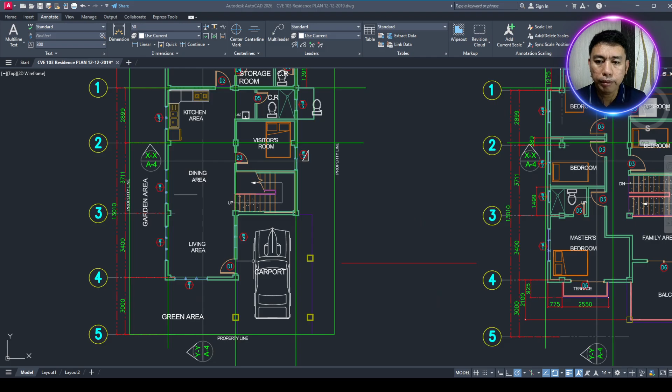So this is a continuation of the architectural part of our design. So far we finished the floor plans, so hopefully you already established your floor plans and there's nothing more to edit. But if I had comments before on the floor plan, please try to update it, but not the overall form or overall layout of the floor plan. The details you can enhance regarding the details.

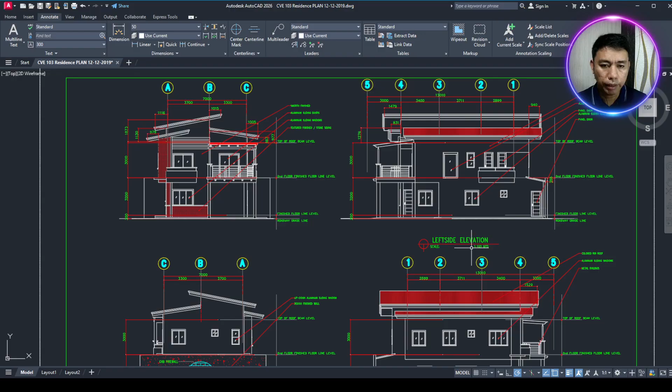Okay, so we are still on the architectural part. We have the floor plans, and then we just finished the elevation views of our model. Although you already submitted the requirements for the elevation views, you still need to update the details to enhance them, minor details, so that when we get to the overall submission of the design, at least your drawing is enhanced. Make sure you follow the guidelines I gave, the photos I sent in our group chat. So we're done with elevation views, and then the roof plan view, and then we have the cross-section views.

So there are things in the architectural aspects that we need to discuss further. This is also what you need to add to your plan. So we have the doors and window details. The doors and windows you used, let's add details to them. So this is what I'm talking about, the elevation view of doors and windows.

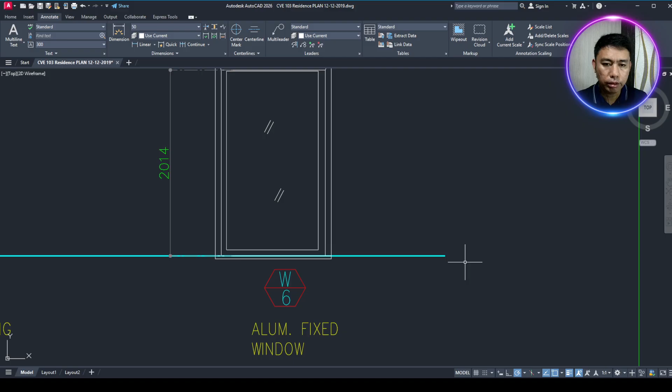It has a dimension, okay. So yeah, this is what I said, 900 mm or 0.9 meters - I didn't label it here, but there's a finished floor line. This blue line here is the finished floor line. So the window, this is not - this is the very bottom of the window. But this one also has a design on the outside, if you can see, it's like a molding. I think molding is the term.

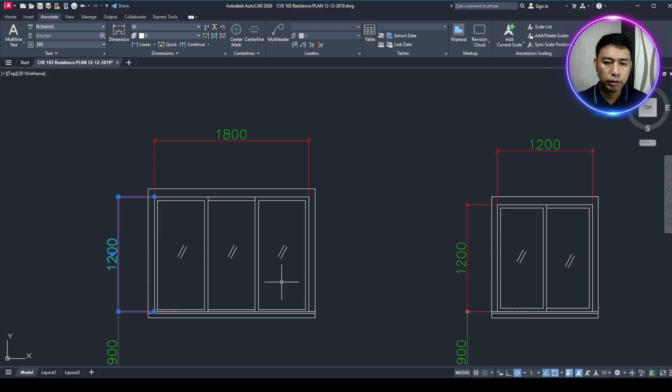Aside from the detail, the opening of the window, you should have a detail there. So this is window, three windows here, and then a two-span window. This one is elevated, but this is just a special case. Normally our elevation is 900, but this one can differ. We can make a small window, but the header at the top should be level. The door and window headers should always be level, 2.10 is our standard.

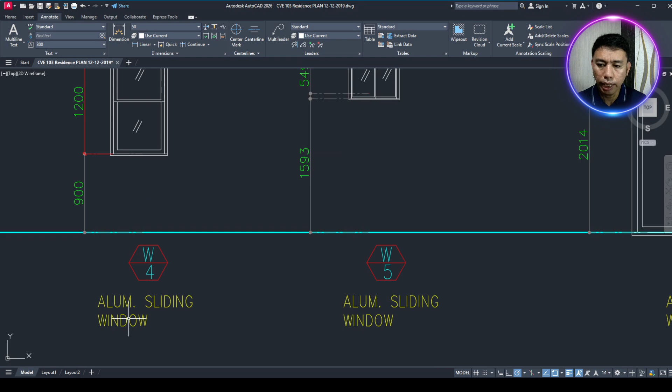And then you have these, like sliding windows - aluminum sliding glass window, yeah, aluminum sliding window. Then this one is a fixed window, just glass, that's why it's fixed.

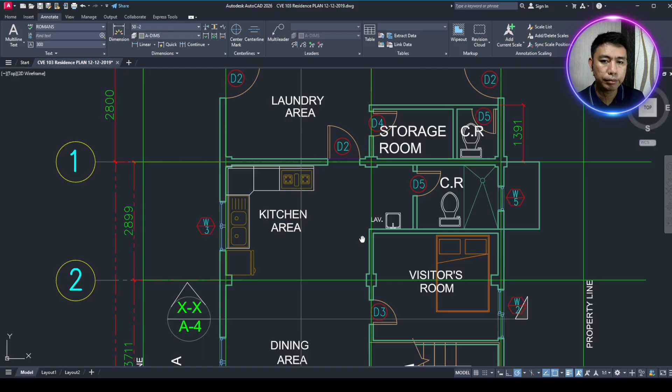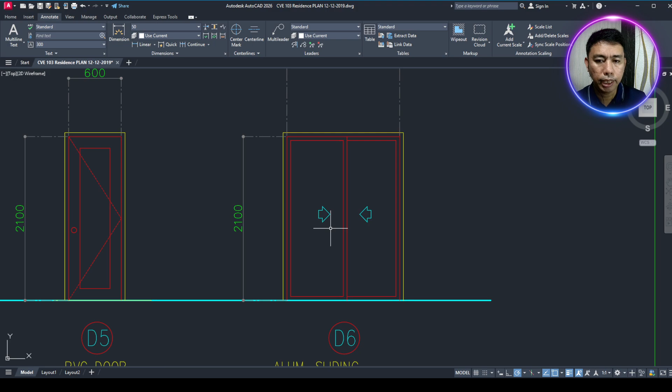Then we have sliding doors. You have to put an arrow indicating the direction of the slide. So this one is an aluminum sliding door - D6. If you look at D6, we can see where it is, at the terrace, because there's a sliding door we made there.

So, yan. Okay? So, you have to add this one, doors and window details. Okay? And, by the way, the template, ibibigay ko itong template sa inyo later na. Okay, itong templates, paano i-arrange. Sa final submission, this one is for final submission. But you need to submit first, ito yung mga individual details.

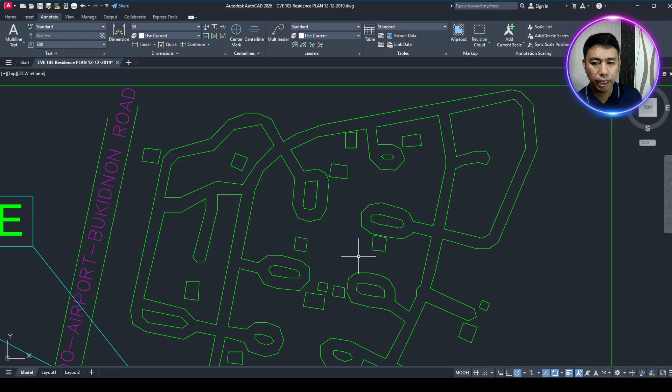Yan. And then parang mga bahay yan siya. Yan yung mga bahay na makikita. Okay. So, from this one, i-identify nyo kung may mosque, may church. Yan, mga important landmarks yan siya. Okay? Para the building officials, when they will visit the site, they will know where to find it using the vicinity maps.

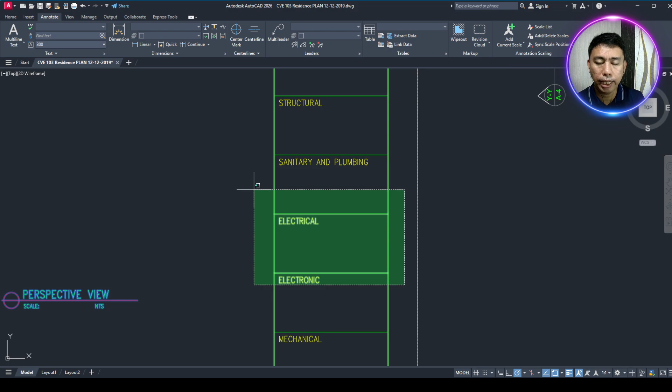Alright? So, yun ang idagdag ninyo. Meron pa pala, mayroon pang perspective view, but ang perspective view later ko na gusto kong i-discuss sa inyo on-site, sa classroom na. But so far, ang i-finish nyo muna is yung doors and windows details and then the site development plan and then the vicinity maps. Okay. So regarding the templates, I will give these templates to you later for your reference. Okay. So, hindi ko na ano sa inyo ito, but ibigay ko na lang.

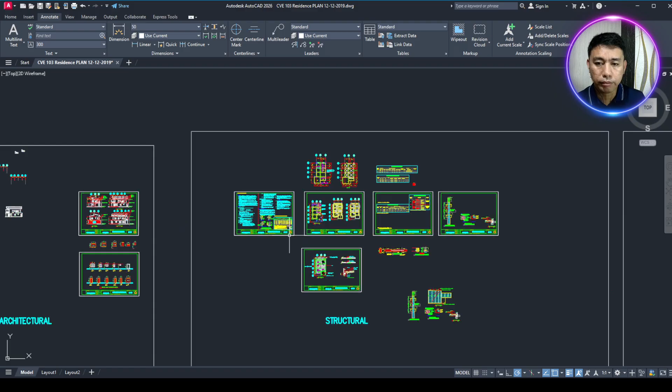Okay. So, this is what you need to do. And then, matapos na natin yung architectural part ng design natin. So, now we will go to structural. So, itong drawing ko naka-categorize siya. Mayroong category ng structural, and then we have electrical, plumbing here. Okay? So, hopefully, ubusin talaga natin ito up to plumbing. Now, we will proceed with the structural. But before that, I want to discuss first what are the structural elements of our design.

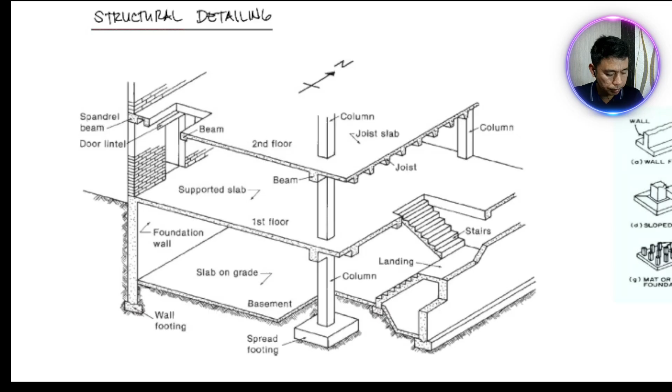Okay? So, bakit nawala? Bakit ayaw? Let me check my phone. Ayaw niya pa rin. A moment. Kasi, can just keep this one forward na lang. Okay, that should be okay. Yan.

Okay, so I will discuss first the structural elements in our plan. So before we proceed to structural detailing, what are the parts of structural? What are the structural elements in a building? So, ang structural is parang skeleton ng building. So, ito yung nagki-carry ng strength ng building. Strength against loads, yung mga tao, yung mga furnitures, and in general, we call it gravity loads. Okay? Loads caused by gravity.

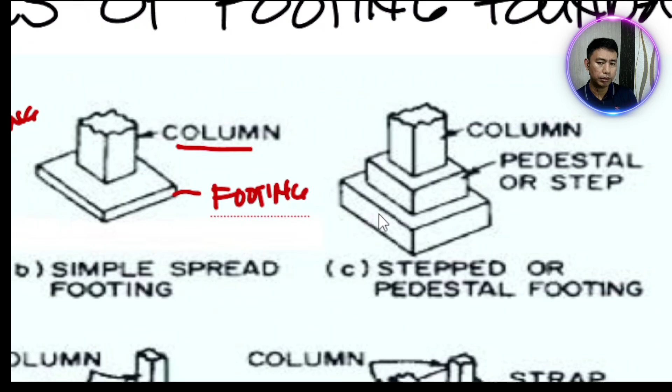Okay? I-spread natin siya. So, merong engineering calculation rin yan on how to design the spread footing. Okay? And then, aside from the spread footing, merong mga enhancement to facilitate this,

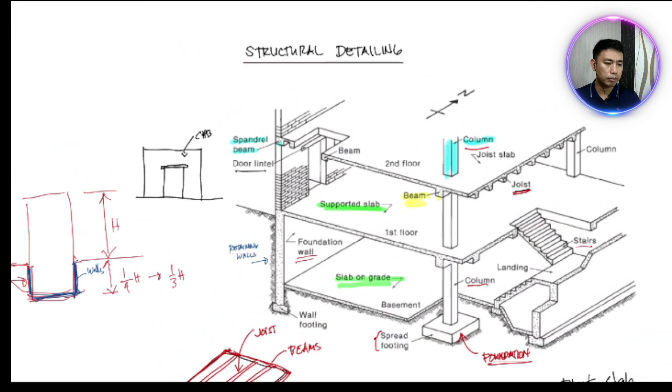So, the first thing is, sa structural plan, maglagay tayo ng construction notes. Ito yung mga detalye kung mga general information about the structure. Ito ibigay ko na lang sa inyo later. Dito naka-detail kung ano yung strength ng concrete na gagamitin natin, sa footings ano yung strength. So, you need to be careful in here.

Kasi kung ano nakalagay sa plano natin, legal documents yan. So ngayon, kung let's say sa column o beams, in-specify mo 3,000 PSI or 21 megapascal, tapos ang na-deliver hindi siya na-umabot ng 21 megapascal, so you can file some complaint kasi hindi nasunod.

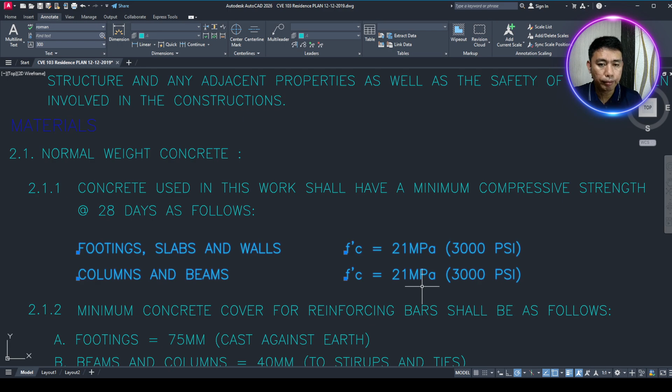Diba, so ganun. Then mga minimum concrete covers, ano yung mga diameter ng bars na gamitin, kung meron tayong diameter bars, ano yung mga anchorage length. Anchorage length is yung connections niya sa mga bendings. Tapos mga lap splice, kung magputol tayo ng reinforcements, mag-lap yan siya, kasi hindi naman natin mapadugtong yung dalawang rebar lang, so we need a lapping, nagka-lap siya ganyan. So ano yung mga lap length niya, kung tension bar siya, kung ang steel natin is under tension, at mayroon ring difference kung under compression bars.

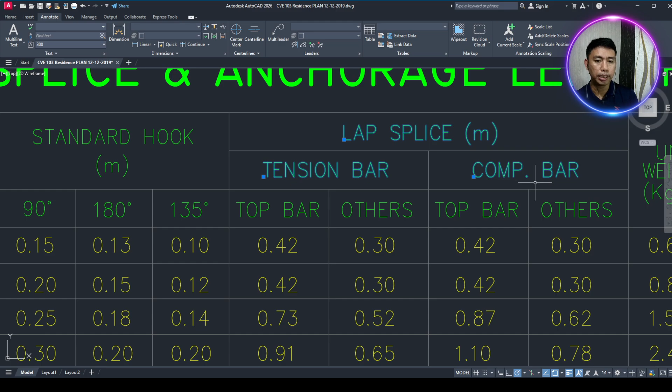So this one, I will not let you prepare for this one, I will just give this to you.

Ito yung mga typical wall footing. So typical na siya masyado, meaning no need for structural calculations na ito.

Mga typical, kung interior wall, kung exterior wall siya, ganito diba. Kung perimeter wall siya, meaning yung footing natin naka-offset siya to left dito kasi sa right niya, lote na yan ng ibang property na sa gilid niya. So we cannot, kahit sa footing, pag mag-ukay sa footing, we cannot touch the other property, the adjacent property. Kaya ito yung footing niya, kung ito yung walls natin, yung footing niya is naka-offset siya.

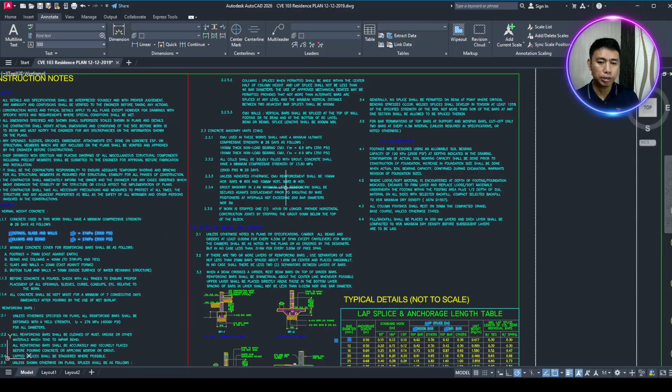So anyway, this is the construction notes, and then yung mga typical materials, material strength. Then, so the first thing in the structural design is we will start with the foundation plan.

May kinapi ako dito. So di ba pinalagyan ko sa inyo ng poste yung design natin, yung mga columns natin, so you have to reflect here. Ito parang floor plan siya pero sa ilalim siya sa foundation, you have to reflect your columns, yung gidesign natin ng mga columns. Di ba sa floor plan natin, meron tayong columns, this one.

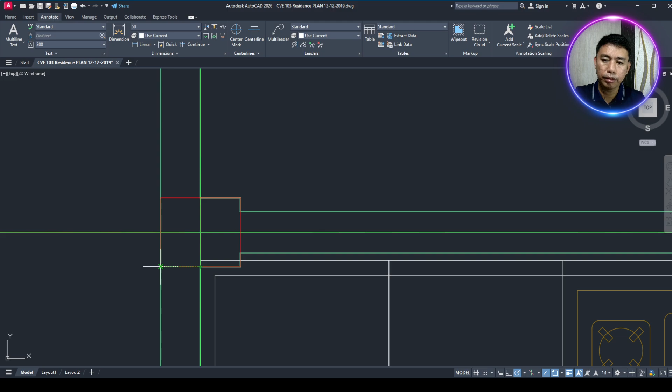Ito, naka-identify yung mga columns natin, parang ganyan yung columns dito. At saka you need to copy-paste those columns, ito mga poste natin. Copy-paste that one and then create. Naka-grid pa rin siya, kung ano yung saan makikita yung columns natin, yung positioning ng grids, ganun pa rin, naka-grid siya.

And then naka-grid, mayroong mga distances, so ito na yung footing natin. So this is the footing and then the columns. So for now, nakaano lang muna kasi wala naman tayong firewall, tingnan niyo firewall kasi ito dito na part, so yung footing pad ko naka-offset siya, hindi tayo pwedeng maglagpas doon sa likod.

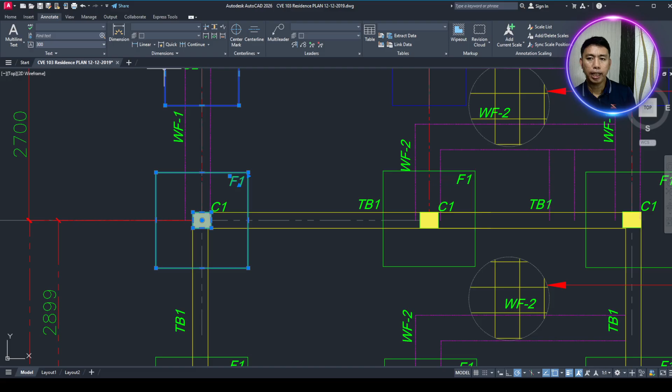Pwede tayong kasuhan 'yan, so we'll just offset this one, ganito yung footing niya. And then ang footing dimension, ah ito sa design natin sa bahay, ilan ba ito? 1.5, okay, so magdepende kasi yan sa lupa, pero we can stick at 1.5, 1.5 and 1.5. So if I will go back here.

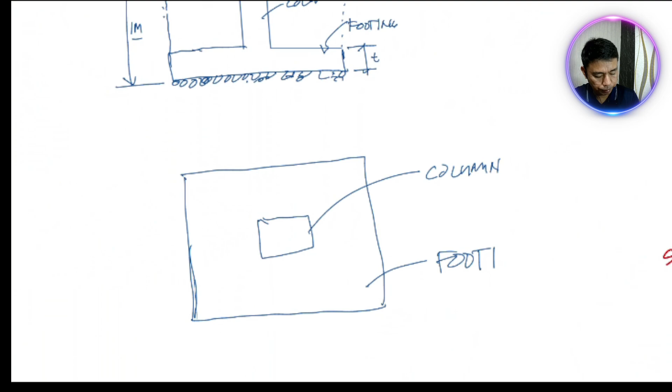Wait, saan yun? Di ba ito yung footing natin sa section view? Now if we create the plan view ng footing, parang ano lang siya. Ganyan yung tingnan sa plan view, kaya hindi ko na i-perfect ha. Ayan, ito yung column, ito yung footing, ito yun siya.

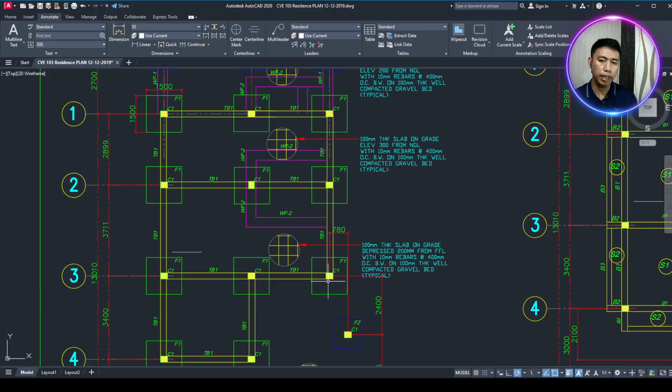Right, so tingnan natin sa plan view, parang ganito lang siya tingnan sa plan view. Parang ganito siya tingnan sa plan view, yan may imagine niyo, columns, these are columns and then the footing. So i-layout niyo muna yung mga poste, at mag-draw kayo once na-layout na yung mga poste.

Okay, so for your design, ito, naglagay ako ng label na F1, that means footing 1 yan siya, kasi meron rin akong mga ibang footing dito. Meron akong F2, merong F3, it's like this one, F3. So lagyan ng label, on your case pwede F1 lang muna tayo lahat ngayon. At pwede ka mag-F2 dito, meaning maliit siya, medyo maliit siya na footing.

Let me check the time. Okay, almost 1 hour. Anyway, I will stop here in the footing.

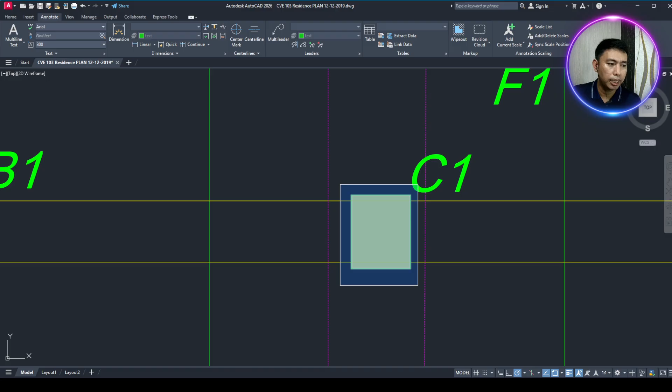So, meron tayong column, lagyan nyo ng column C1. Kung meron kang C2, then you have to write C2. Ito na columns. Pwede yung columns, C1 pa rin ito, pero iba yung orientations na nakapa-upright siya. Dito, sideward. Upward siya dito, naka-sideward.

And then, meron tayong tie beam. Ano yung tie beam? Yung tie beam, sila yung naghahawak. Parang strap pa rin siya, pero hindi siya diretso dun sa footing. Balik ako dito sa ano.

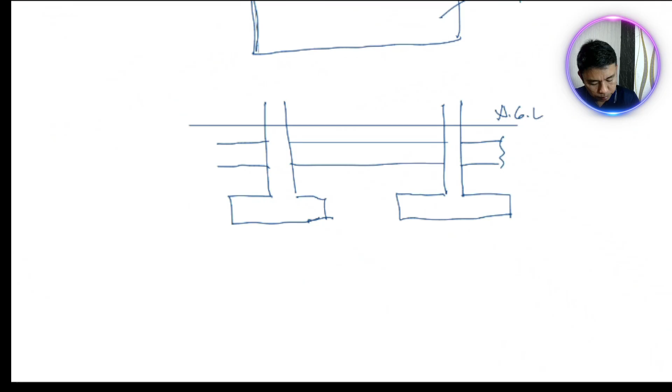Ang tie beam is, let's say, ito yung NGL natin. And then meron tayong, let's say, meron tayong dalawang magkatabi na footing. Ganyan. So, ang tie beam is somewhere here. Tawag dyan is tie beam. Somewhere na parang normally nasa 0.3 meters or 0.2.

So, ang purpose ng tie beam, para hawakan yung dalawang poste natin. Matibay siya, medyo matibay siya kung may tie beam. Possible settlement, sabay sila, and then may additional ka pa na hawak during lateral loads. Ang advantage rin ng may tie beam, di ka na kailangan magawa ng wall footing.

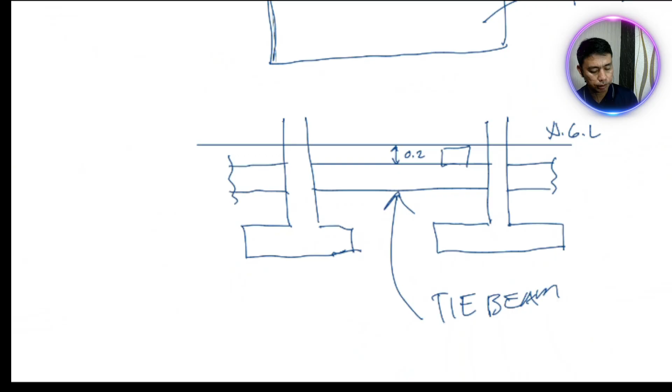So, pwede ipatong mo na dito yung hollow blocks mo. Diba, meron tayong hollow blocks. So, pwedeng nakapatong na lang yung hollow blocks natin dyan, parang ganyan. So, magsisilbing footing na rin siya. Kung walang tie beam, tapos may wall, dapat mag-identify ka talaga ng wall footing.

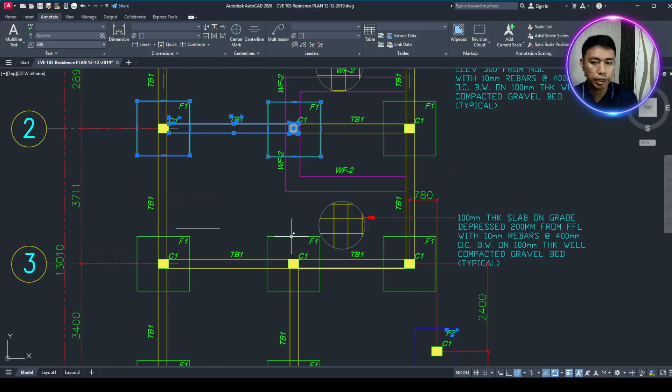So, ito magkatabi, ito na part dito, wala siyang tie beam, pero may walls ako dyan. I think CR ito, so may wall siya. So, kailangan ko maglagay ng wall footing. Kaya ito yung linya ng wall footing natin ng CR, sorry, ng wall.

So, dito rin, wala tayong tie beam dito, so naglagay ako ng wall footing. Dito, wall footing. Mayroong wall footing 1, wall footing 2. Saan yan? Ito yung drawing natin. Ito yung wall footing 1, wall footing 2, wall footing 3, at saka wall footing 4.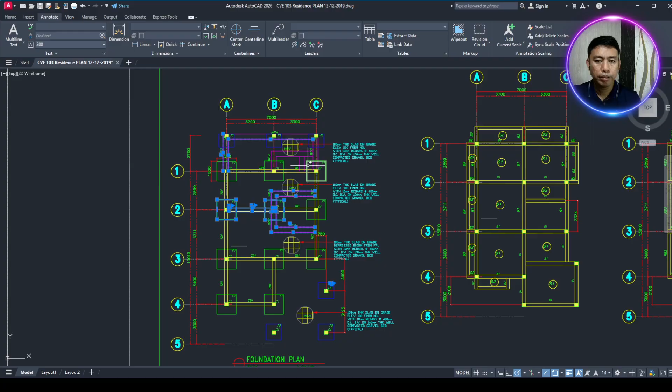Okay, so kung naglagay tayo ng annotations dito, dapat meron din tayong specific details. So, ito yung gagawin nyo muna, foundations, and then foundation plan. Ibibigay ko rin ito, ang copy nito, ipiprint screen ko ito, and then I will give you the copy for the preparation ng foundation plan.

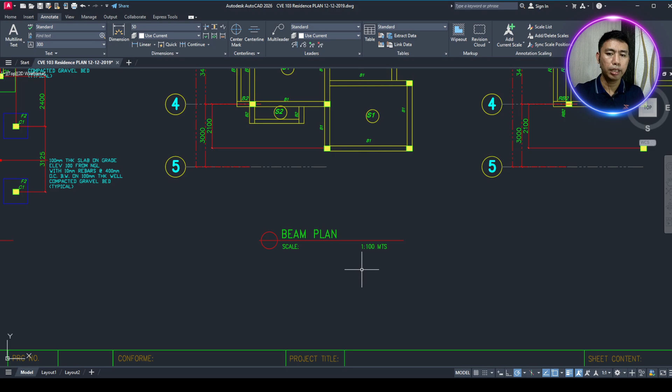And then, after the foundation plan, dito sa second floor, we will draw the beam plan. Actually, dapat itong ano, this should be beam plan. And then meron tayong roof beam plan. Ito yung sa second floor natin, ito yung beam plan.

So, kung mayroon tayong, di ba, mayroon tayong mga columns. So, ano yung na-draw natin na columns dito sa foundation plan, i-copy paste natin. Ganun, naka-grids pa rin siya. So, i-copy paste natin yung columns, tapos i-connect natin siya with beams. Ito, extension na ito, parang overhang na ito. Wala siyang beam sa baba, walang column sa baba, meron lang siyang beam.

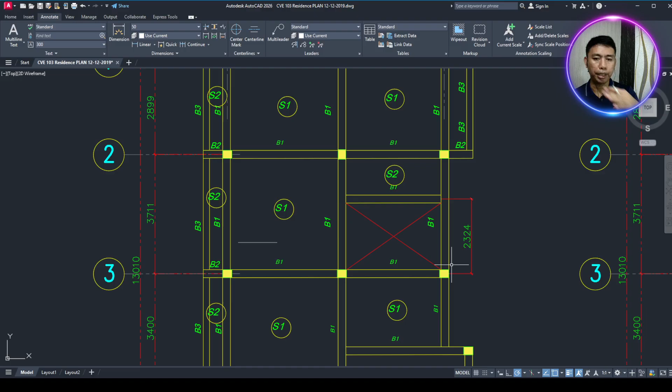Tapos, yung area between beams na may sahig tayo, lagyan nyo ng S1, meaning slab 1. Later na natin i-detail yan, but that means that in that area, meron tayong slab. Ito dito, hagdanan kasi ito, so pwede nating lagyan ng X diyan, okay, meaning that is an opening. Opening siya, walang slab diyan siya. So, dito meron tayong slab.

Then, lahat ng slab mayroong beams na nakapalibot. Lahat ng slab natin, walang open diyan, mayroong beam lang na nakapalibot. So, i-continue natin yung poste natin hanggang aabot siya sa roof beam, and then lagyan natin ng details ng roof beam plan. Ito yung roof beam plan natin.

So meron tayong roof beam. Ang roof beam plan diyan nakapatong, ang kine-carry niya is yung mga trusses, yung roof. So diyan nakapatong sa roof beam. Ito yung mga nakalagay RB1 yung label. Okay, and then later bibigay ko lang ito na sample sa inyo.